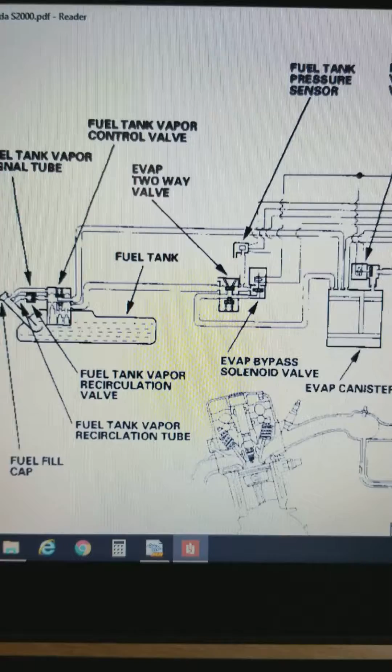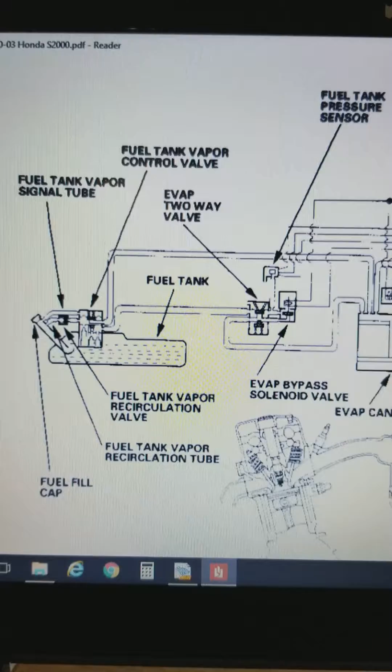So if you're like me, you ran into the problem that you install your AEM EMS version 1 on the car, and a little while after you started smelling fuel and your tank started building up a lot of pressure. That is because unless you went into the settings on your AEM EMS and made certain adjustments, your system is not purging. So this page right here is from the S2000 service manual, and I'll give you a quick rundown on how the system works.

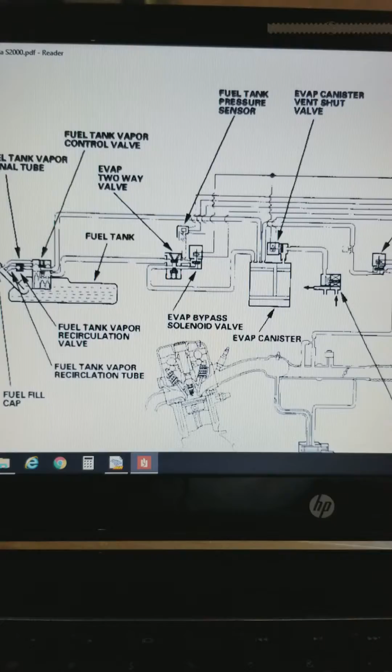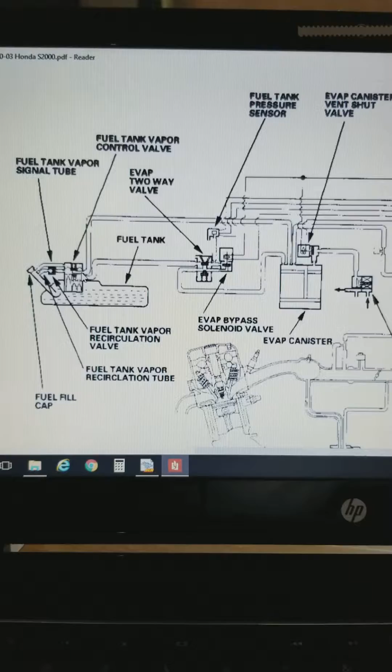Alright, you have your gas tank right here, your fuel tank vapor control valve. It has two outlets coming out of it. Both of them end up going to the EVAP canister. One is a direct line, which is the line that is used when you're filling up your car with fuel. That way you let all the air out and you can top it off.

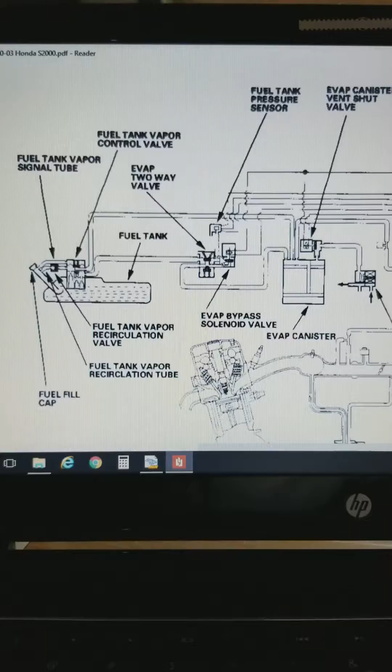The second one goes through your two-way EVAP valve, and that's for the fuel pressure that gets built up while you're driving the car. When your sensor here senses a certain amount of pressure, it opens your two-way valve and allows the gases to go also into your EVAP canister.

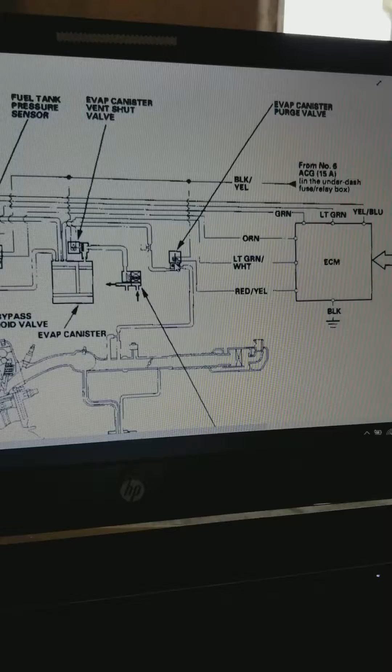Now your EVAP canister also gets fresh air coming in, and there's one line that goes out to your EVAP canister purge valve, which is right here. When this purge valve actuates and opens, vacuum from the intake manifold sucks all those gases out of your canister and mixes them up with your incoming air and fuel into your combustion chamber, burning those gases out.

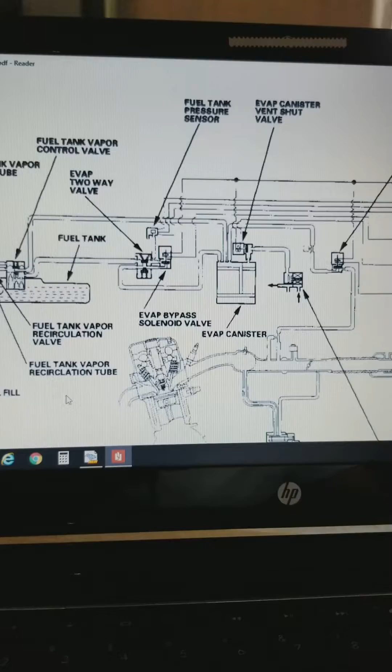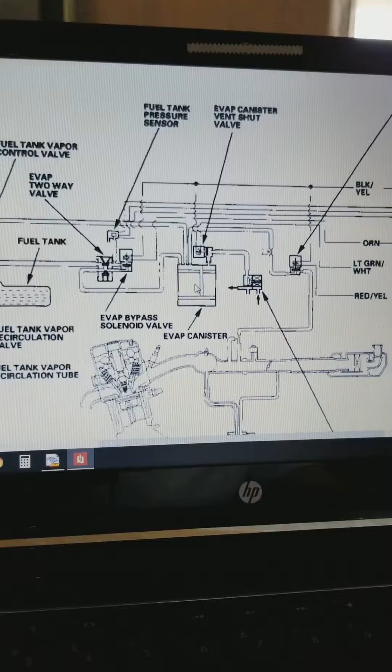Alright, so that's basically a quick brief of how the EVAP system works on your car. Now, the reason why you're smelling fuel is because unless you make adjustments to your AEM EMS, this purge solenoid right here will never actuate, never letting the gases that build up inside the EVAP canister come out. So your EVAP canister becomes saturated and eventually starts leaking, and that's where you get your fuel smell from.

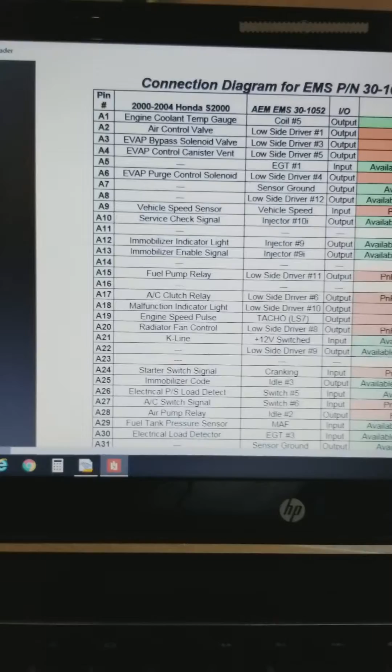Okay, so now to the adjustments. If you go to your manual for your AEM EMS 30-1052, you will come to this page right here. It tells you all the connections going to your EMS.

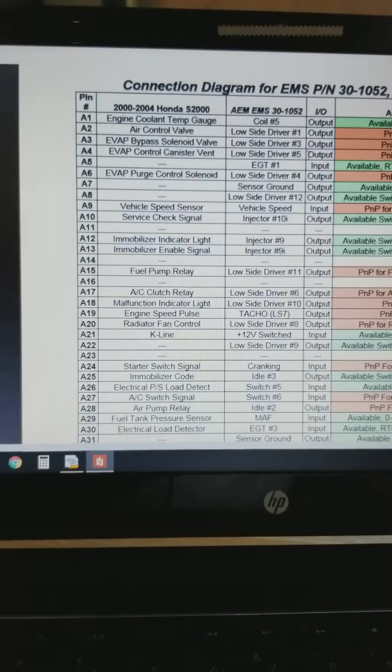You can see that A3 is your EVAP bypass solenoid valve, which is connected to your low side driver number 3. A4 is your EVAP control canister vent, which is connected to your low side driver number 5. And your A6 is your EVAP purge control solenoid, which is connected to the low side driver number 4.

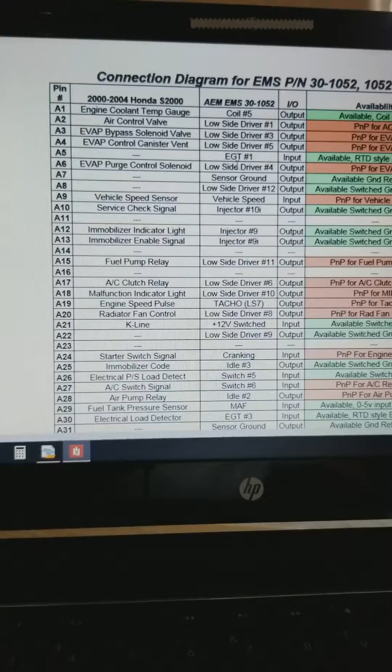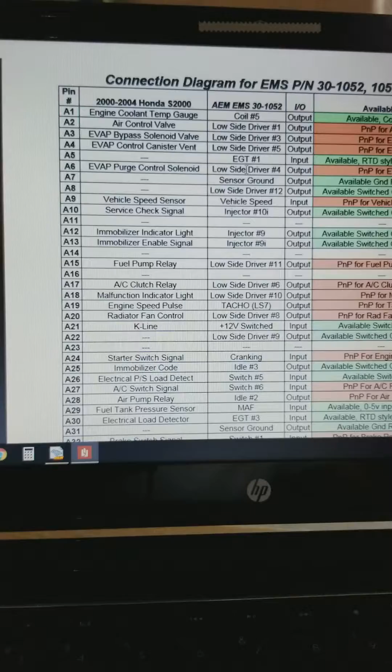Alright, so this right here alone proves that this system was built to control your EVAP system. Unlike a lot of the information on the forums where people say that the AEM EMS does not control the system, so just rip it out of your car. I mean, it's your prerogative, you do with it whatever you want, but I'm here to show you how you get the system to work.

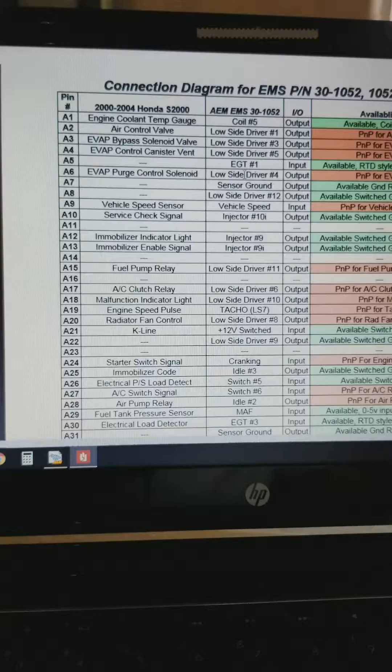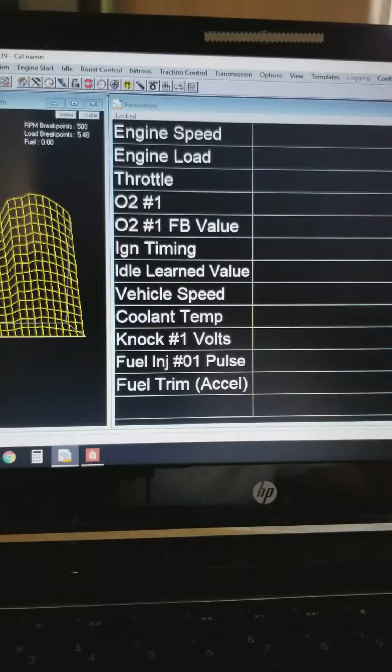Okay, so what we're going to do is we're going to open AEM Pro. And this is the basic map that comes with the program. This is not the program that I have loaded to my car right now. For security reasons, I will not put that program out there. Call me skeptical, but that's just me. But this is how we get this system to work.

So we come to Setup, Advanced Setup, EVAP Purge Control, and your Purge Options. You're going to come to the small screen right here. This is the reason why your system right now is not working. From factory, these options right here are all disabled, which is why your EVAP system is right now disabled.

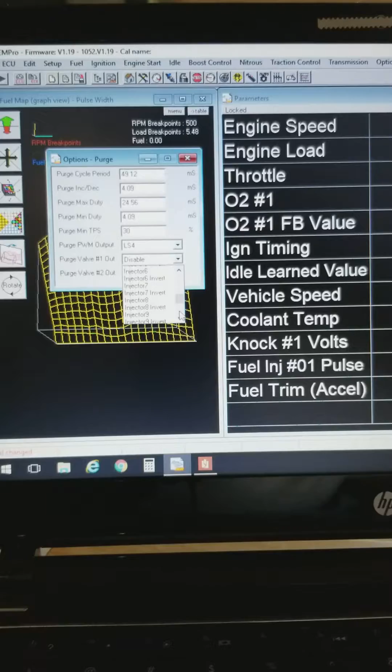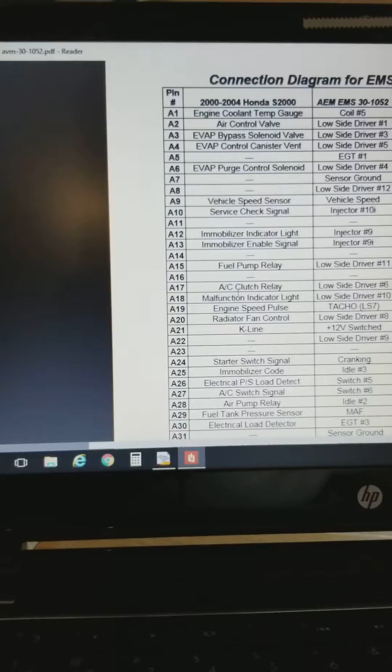So your purge PWM output is going to be set to low side number 4. Purge valve number 1 out is going to be your low side number 3. And your purge valve number 2 out is going to be your low side number 5. So now you have assigned your EVAP purge control solenoid to low side number 4, your EVAP bypass solenoid valve to number 3, and your control canister vent to number 5, as per the manual.

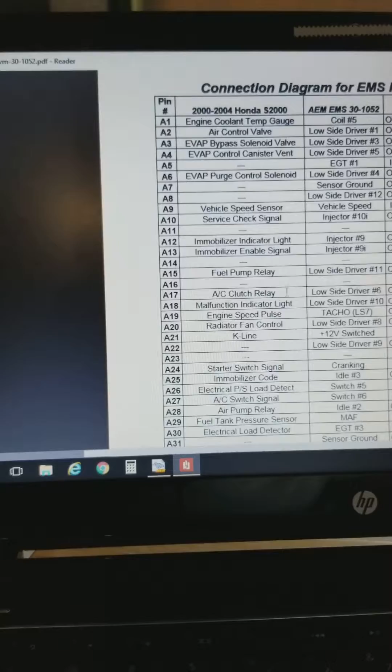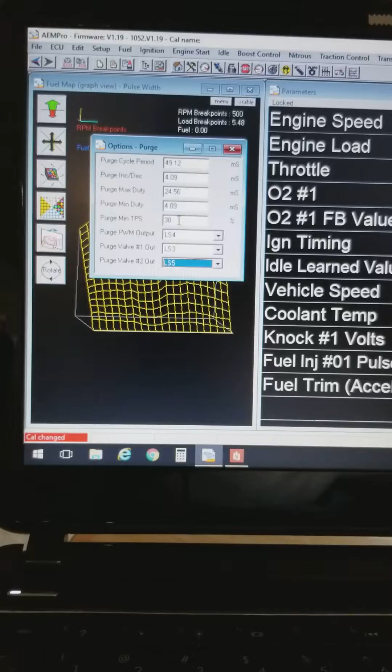Now, yes, this actuates the system. Yes, this basically makes it active. However, there's a second setting that you need to be aware of when you're doing this, and that is the number right above: your purge minimum throttle position sensor. Factory comes set at 30%, which is pretty high.

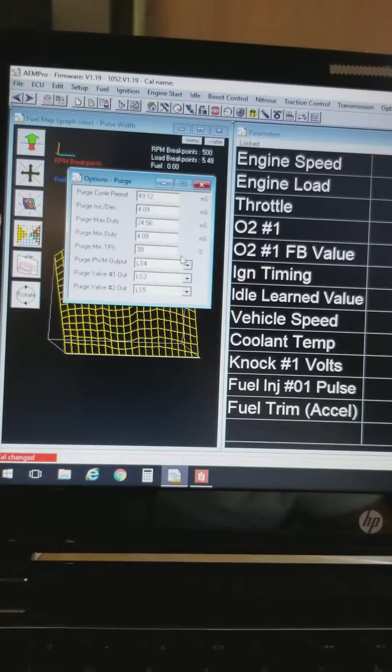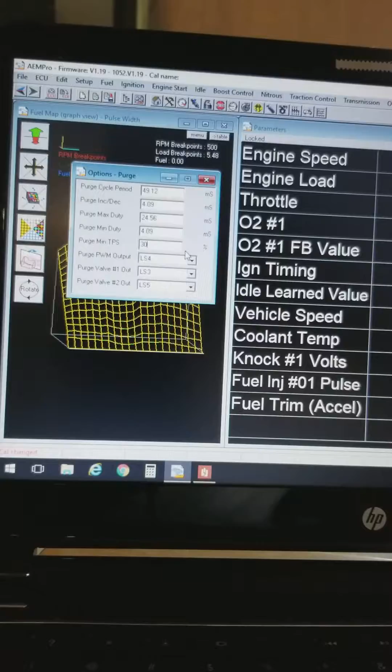What this means is that none of these outputs are going to actuate unless your throttle is at more than 30%. So for your system to purge, your gas pedal has to be pressed more than 30%. Now, 30% is pretty high in the RPM band. When I was doing the testing yesterday, running on the highway at cruising speeds between 75 to 80 miles per hour, my throttle was only open anywhere from 15 to 18%. That's if I was going over a little overpass and the car had to pull a little more gas, it would go to 18. While I was steady cruising on a straightaway, it was about 15%.

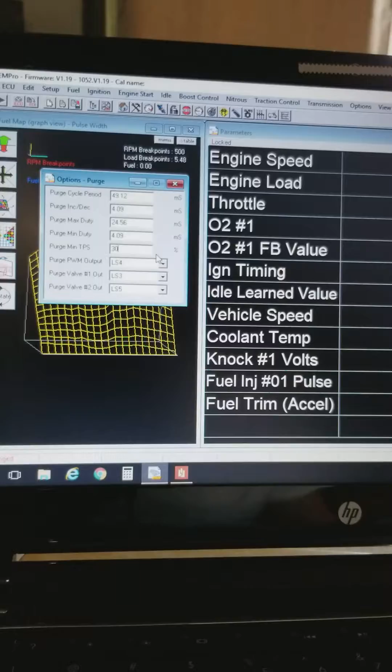Unless on your drive you hit 30% or more in your throttle - and you know we all do, downshifting gears, trying to get up there, hit VTEC, hear that engine screaming while we're speeding up.

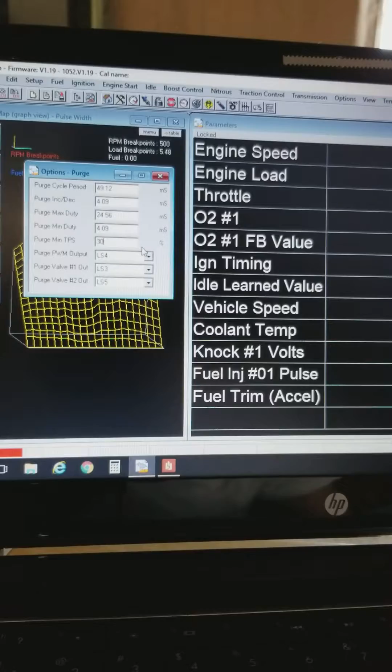But that's not long enough for you to purge that tank. You need to be able to run that purge system for a couple of minutes to get rid of that pressure buildup in your tank and all those fuel vapors, because the purge solenoid minimizes the amount of vacuum coming in from the intake manifold. So you're not getting full vacuum on the inlet side of that solenoid.

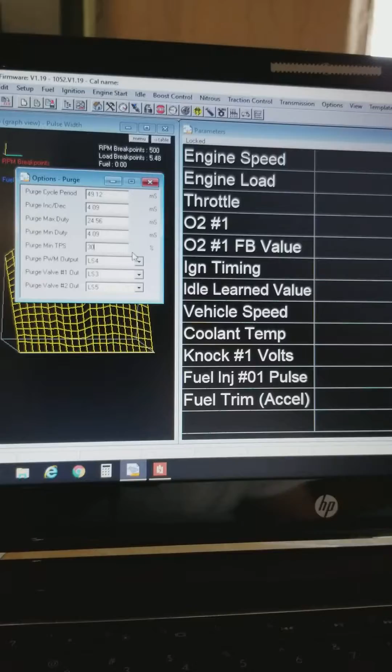It's very minimum. If you want to test it, unplug the suction hose coming from the tank, turn on the car, set this to 0 so that solenoid is open, put your finger on it, and you'll feel that it's a very faint suction on that solenoid.

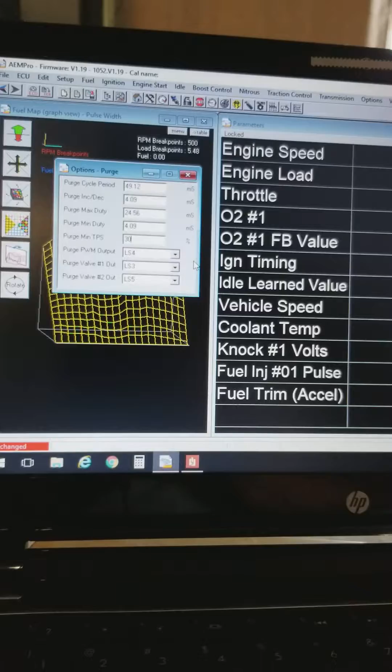Thank you. So what I did yesterday was, at first I ran the car at 30% throttle, and I was watching it, seeing where in my RPM band I was hitting 30, and it was a few seconds here and there - like I said, shifting through the gears, getting up to highway speed.

I came to the house, shut the car off, opened my gas cap, and there was pressure built up in the tank.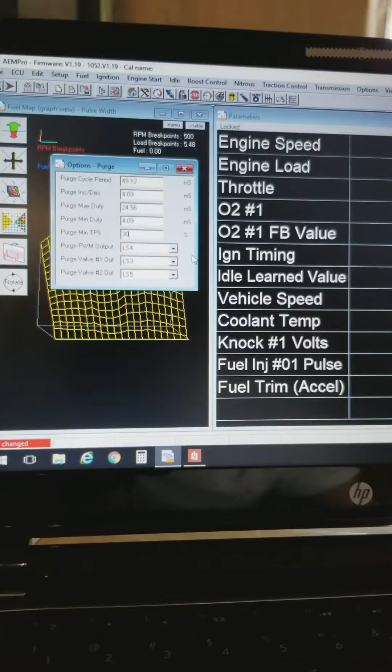So I plugged in the computer to my EMS, made an adjustment, and set this number to 15%. And I went for a run again - same exact run that I did before.

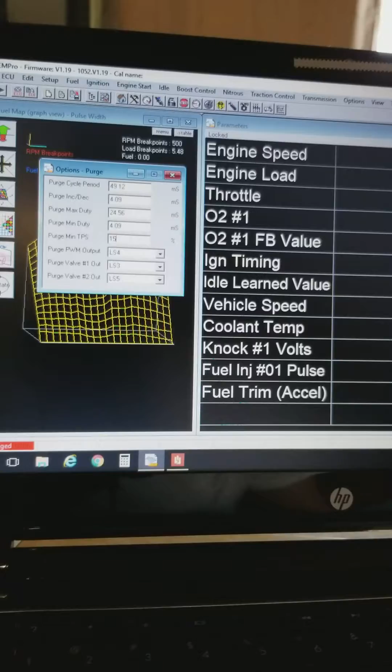Watching my throttle, it was mostly running 15.6, 15.8, and again depending on the conditions on the highway it jumped up to 18. Came back to the house, shut the car off, opened up my gas cap, and there was no pressure built up. So I know the system was purging the whole time I was running my car on the highway.

So, tried and tested, I stand for it. If your solenoids are working on your system and you set it up like this, your EVAP system is going to run.

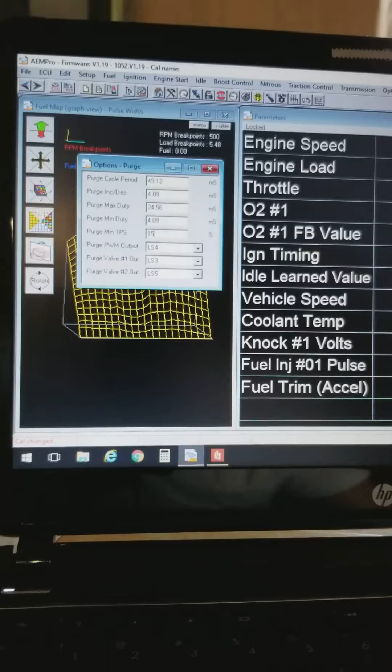Now, the thing is that when you set this at 15% or any percentage where you think your car is going to be running for a little while so you can purge the system, the fumes coming in from that EVAP canister into the intake manifold are going to affect your mixture - your air-fuel ratio mixture. Mine went rich on some points, lean on some points on my fuel map.

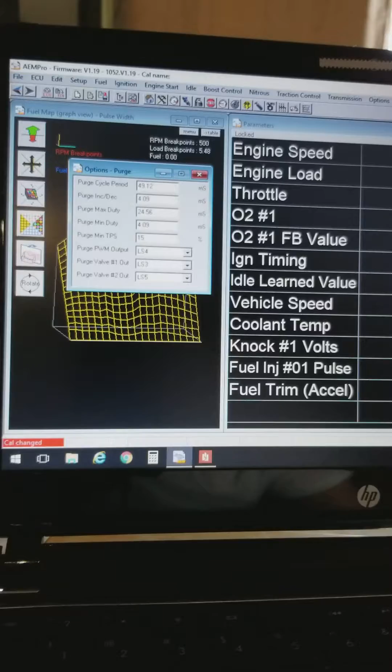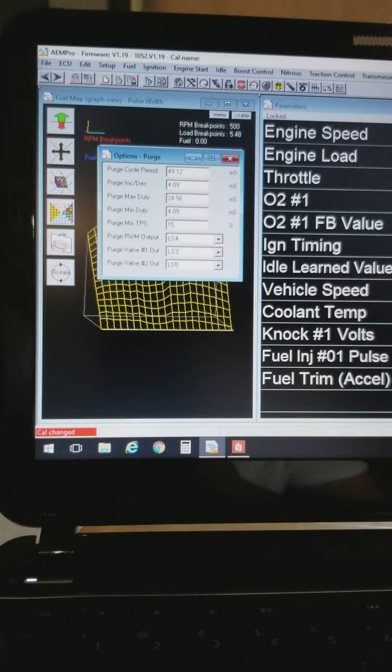So I've yet to adjust for that, but you're going to need a little bit of tuning to your fuel map once you get this system operational. Now again, this is what I've done in my car and what I've proven works for me. You take this information and use it as you want.

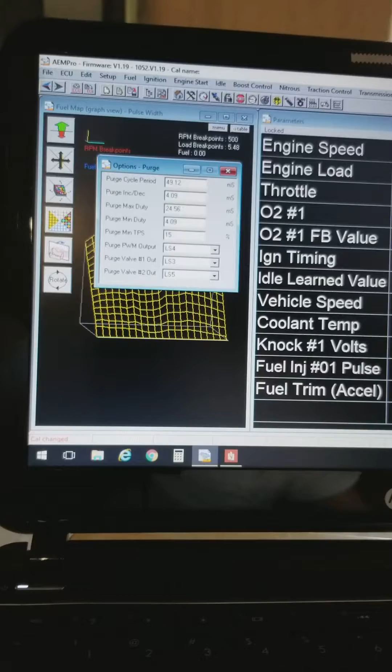The reason I'm doing this quick video is because if you're looking at this, you had the same problem as I did. You read the forums, you see what a lot of people did with their systems when they put AEM EMS - which was pretty much just yank it off and let the tank vent to the atmosphere.

Which to me is a bad deal, because fuel evaporates at atmospheric temperature, and I don't want my fuel tank depleting while it's sitting there in the garage doing nothing. So at least this way you keep the system sealed and intact, and it'll purge when it needs to.

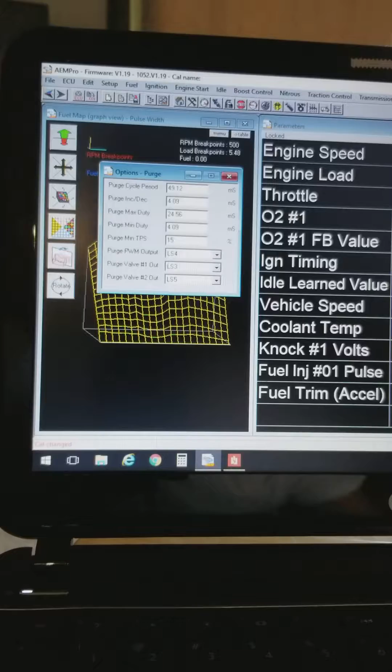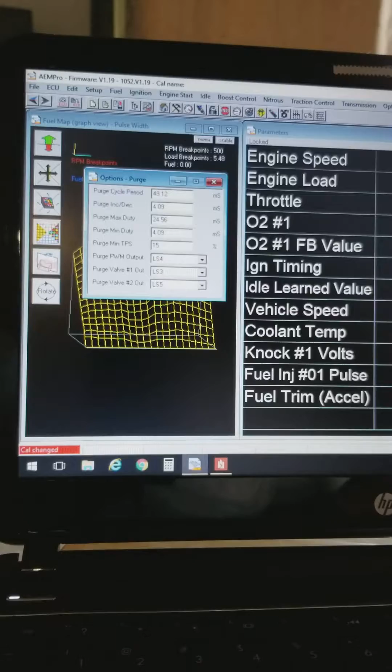But yeah, I read in one of the forums somebody mentioning doing this. I didn't see any pictures, I didn't see any video, so since I went out and tested it in my car and found it to work, I figured I'd share this with everybody else that has an AEM EMS version 1 on their vehicles and wants to get rid of that pesky fuel smell or the pressure buildup in the tank.

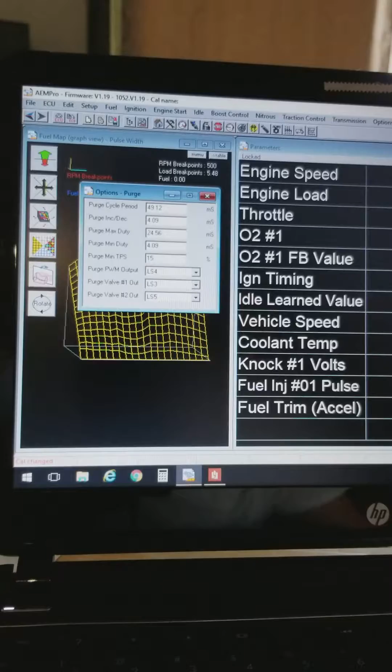This is how you get AEM EMS version 1 to activate your purge system on your car. No need to rip it off, no need to plug anything, no need to buy vented gas caps, check valves, all this other stuff. The system isn't bothering anything in the car - it's not making it slower, it's not making it faster, it's making it safer.

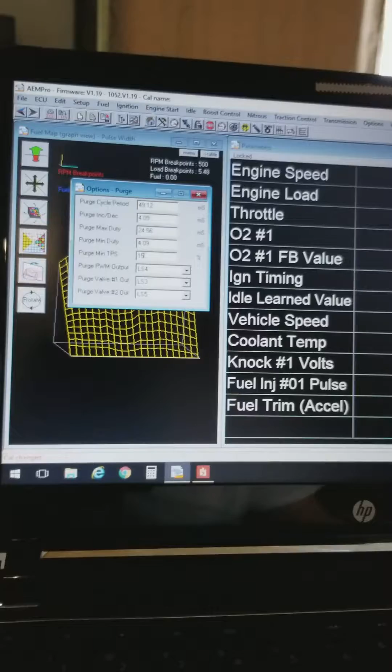Again, I am making this video because I was looking for this information for a long time and didn't quite find what I was looking for. I know that if I would have seen a video like this a long time ago, I would have probably solved my issues a while ago.

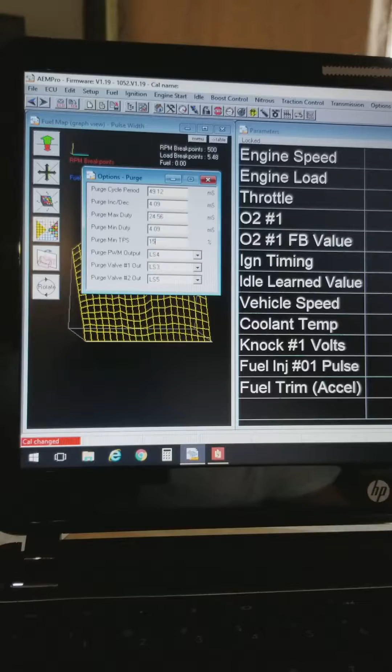This is for the community, this is to share. I love my S2000, just like you guys do as well, and I want nothing but to see you guys running at the best of your ability out there. We're here to help each other out and make our cars run better and last longer, because as we know, Honda's not going to come out with another version. So long live the S2000.